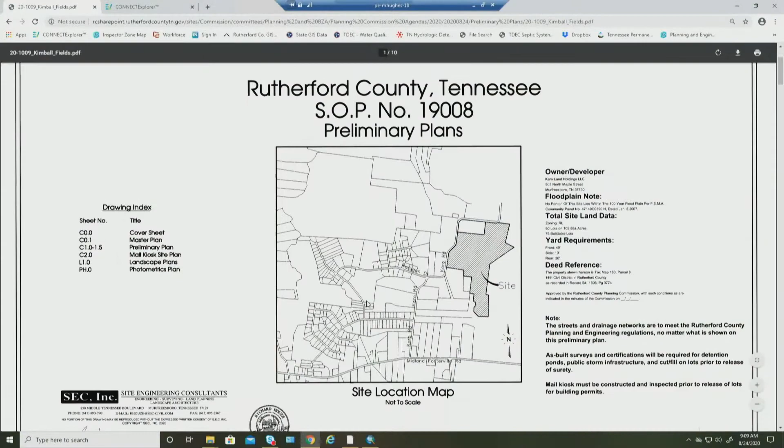A preliminary plan for this development was approved by the Planning Commission back in April of 2019. The original design has been reworked to reduce the amount of paved area and cost of infrastructure. The changes they wanted to make were going to be more than we could approve administratively, so we recommended that the applicant resubmit their preliminary plan and bring it back through the process to the Planning Commission. We did have, as staff, several comments on the plan. Most of what I would call the housekeeping ones have been addressed. There are a couple of outstanding items, though, that we wanted to have some more discussion about here at the Planning Commission.

One of them has to do with the entrance along Carroll Road, the northernmost entrance. There are 2 separate entrance points that Mike's pointing out there. The one we're concerned with is the one on the north side that Mike's highlighting right in that area. You can see it's very close to the 90-degree bend in Carroll Road. We had some discussions amongst ourselves, as staff, and also with the applicant's design engineer, so we'll talk a little bit more about that. Also, the intersection within the subdivision, Mike will highlight that, the one down at the middle about the lots.

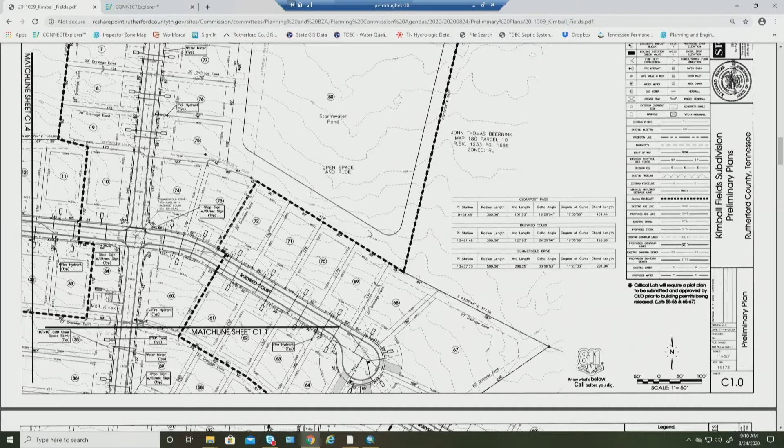That particular intersection, I like the fact that there's multiple ways in and out of this development, but it looks like there's several lots that might be cut off should something happen at that intersection. Mike and I talked about this a little bit on Friday, about the fact that in any subdivision you're going to have some amount of that, where a number of lots might be cut off from the rest of the development depending on what would happen at an intersection. So I don't think we feel as strongly about that one anymore, but we do still have concerns about the one on the northern side, that access to Carroll Road. With that, I'll turn it over to Mike to discuss in more detail. Thank you, Doug.

90-degree road bends were established back in the day to go around farms. They do slow the traffic down a lot. So I'm having a little heartburn about this road connection in close proximity to this almost 90-degree bend right here. There is a fence row that has heavy vegetation along this field. I worry that somebody comes around this corner wide as somebody's pulling out here, and that could be a bad situation.

What we recommended, and we're still open for discussion on this, but I was thinking maybe if we had the proposed road come in and line up and make this a three-way T intersection, with stop conditions all three ways.

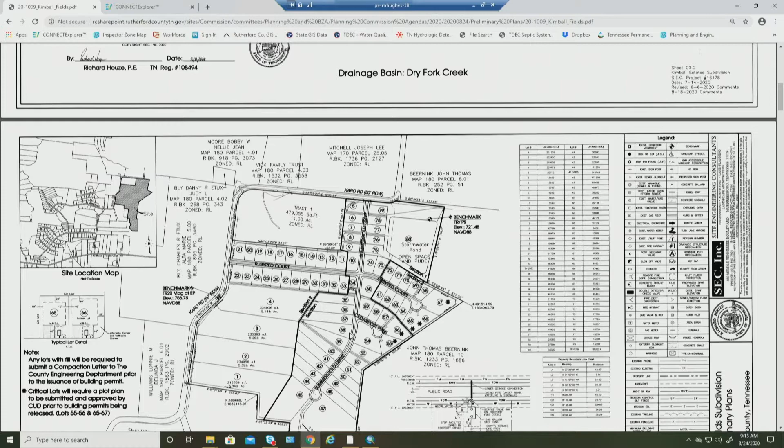Good morning, everybody. I'm Jamie Reed with SEC. Like Mike said, the two major issues, and the reason why we didn't stub it straight into that, was because we didn't want a thoroughfare coming through that little small subdivision. Before we had it approved with one entrance over to this other side. Now we're teeing it up. We ran two entrances into, and it's just 80 lots. We didn't feel that coming straight into the subdivision for a handful of lots for a small residential subdivision was a good design. We like the traffic calming device of them still turning. And on top of that, there's hydric soils right where that road's teeing into, right where we got the pond. Our guys are out there currently doing an HD report right now, but it definitely shows it right there with that tee of that road. So that's the other reason we didn't go out there, because it's not good to have a road on that type of soils or lots. So that's the other reason we pushed that road over. But like Mike said, if it's something the commission feels necessary that we need to move it back over, those are the issues we're faced with. Our thoughts: we're trying to calm the traffic, still make them keep doing like they're doing now, and the soils.

Right. Yeah, what we might look at is lowering the speed limit through here. We've done that in other places. I need to reach out, and maybe Doug can help you get it, if there are any accidents in that corner, maybe we could look at that. But these 90-degree curves in the county give me heartburn everywhere. I understand, like I said, they were developed around farm fields. We've got one, I know, south of Buchanan Estates, just a straight 90-degree turn. Got two past that, another right, 90 and another 90 right there. Yes, you got three 90s within 2,000 feet. If I had my druthers, I'd eliminate them all and slow traffic down the best way I could before I got there. But like I said, there's a fence on this inside track that's a lot of vegetation, so it limits your view around the corner here.

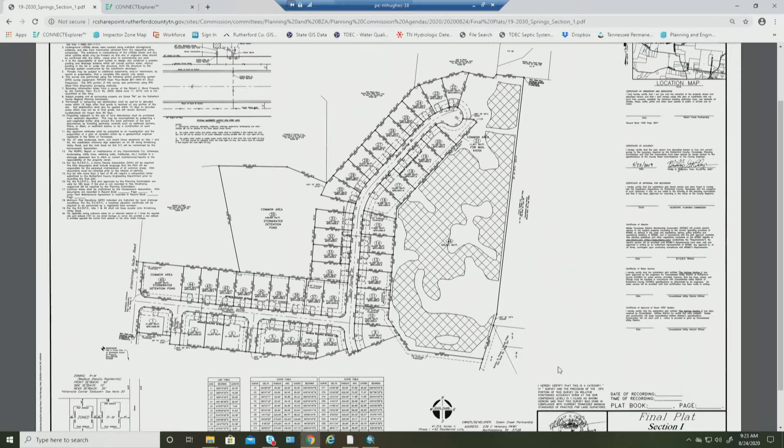Still recommended approval? Yes, sir. Make a motion to approve. And a second. We have a motion and a second to approve item number 19-2030, The Springs, Section 1.

This is a reapproval. Call the roll, please, Gail. Charlotte P., Chip Pinion: Yes. Craig Lynch, David Jones: Yes. Jim Averwater, Lee Bogle, Marvin Whitworth, Mike Cush: Yes. Pettis Reed: Yes. Rhonda Allen: Yes. Jeff Phillips: Yes. Motion carries. Thank you.

Item number 19-2031, The Springs, Section 2, reapproval, 28 lots on 11.98 acres zoned RM, located along Armstrong Valley Road. Salem Creek Partnership is the applicant.

Yes, sir, same thing? Yes, sir. Same bat time, same bat channel. Motion to approve. Second. A motion and a second to approve 19-2031, The Springs, Section 2.

Call the roll. Charlotte P., Chip Pinion: Yes. Craig Lynch, David Jones: Yes. Jim Averwater, Lee Bogle, Marvin Whitworth, Mike Cush: Yes. Pettis Reed: Yes. Rhonda Allen: Yes. Jeff Phillips: Yes. Motion carries.

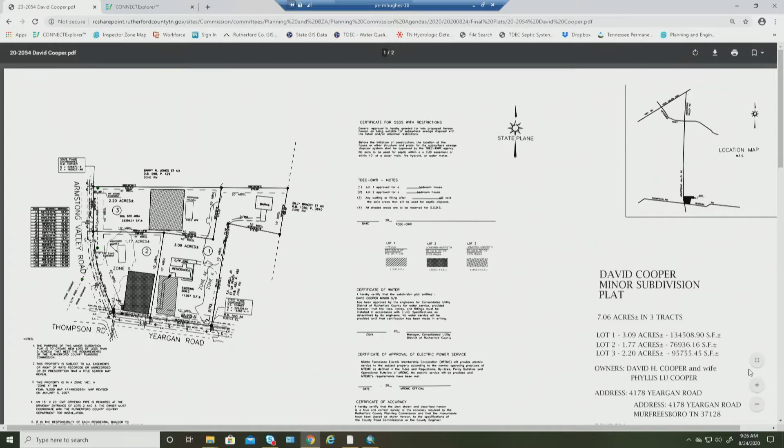Other questions? Call the roll. Charlotte P.: Yes. Chip Pinion: Yes. Craig Lynch, David Jones: Yes. Jim Averwater, Lee Bogle, Marvin Whitworth, Mike Cush: Yes. Pettis Reed: Yes. Rhonda Allen: Yes. Jeff Phillips: Yes. Motion carries.

Item 6C4 has been removed. Item 6C5, the item number is 20-2063, Rooker Landing, Section 2, 29 lots on 6.78 acres, zoned PUD, located off Rucker Road. Landquester LLC is the applicant.

Doug? Yes, sir, thank you. The revised preliminary plan for this property was approved by the Planning Commission back in February of this year. This final plat does appear to be consistent with that preliminary approval. All of our comments have been addressed on this, and the final plat itself is in very good order. So with that, we'll be happy to answer any questions.

Questions? Motion to approve. We have a motion and a second to approve item 20-2063, Rooker Landing, Section 2.

Call the roll, please, Gail. Charlotte P., Yes. Chip Pinion, Yes. Craig Lynch, David Jones, Yes. Jim Averwater, Lee Bogle, Marvin Whitworth, Mike Cush, Yes. Pettis Reed, Yes. Rhonda Allen, Yes. Jeff Phillips, Yes. Motion carries. Thank you.

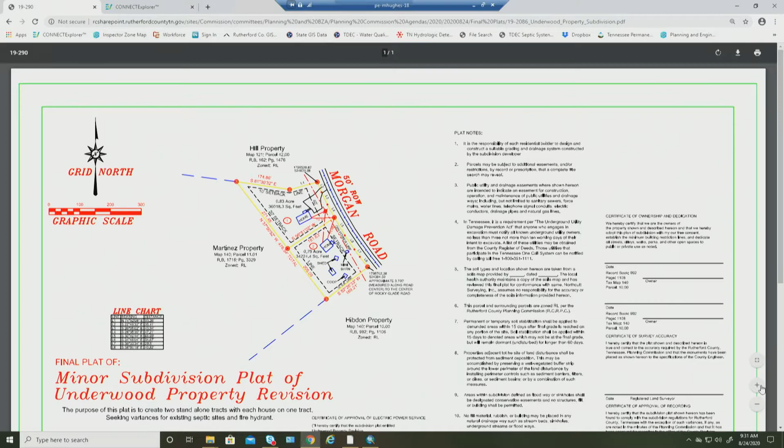I have a motion and a second to approve. I don't know what the item number is, but it is 19-2086, final plat.

Call the roll, please, Gail. Charlotte P., Chip Pinion, Yes. Craig Lynch, David Jones, Yes. Jim Averwater, Lee Bogle, Marvin Whitworth, Mike Cush, Yes. Pettis Reed, Yes. Rhonda Allen, Yes. Jeff Phillips, Yes. Motion carries. Thank you.

Item 6D, these are items submitted for site plan approval. Item number 1, as you can see, is the Burnt Knob self-storage request that has come before this commission several times, and I believe it'll probably create a number of questions. So without objection, I'm going to move this item to the last on our agenda so we can get the other items out of the way first.

Item 6D2, the item number is 203026, Watson Barn Rental, construction of approximately 200 square foot office space and display area. These are for outdoor barns on approximately 8 acres, zoned CS, located along Shelbyville Pike. Watson Barn Rentals is the applicant. Doug? Yes, sir. Thank you.

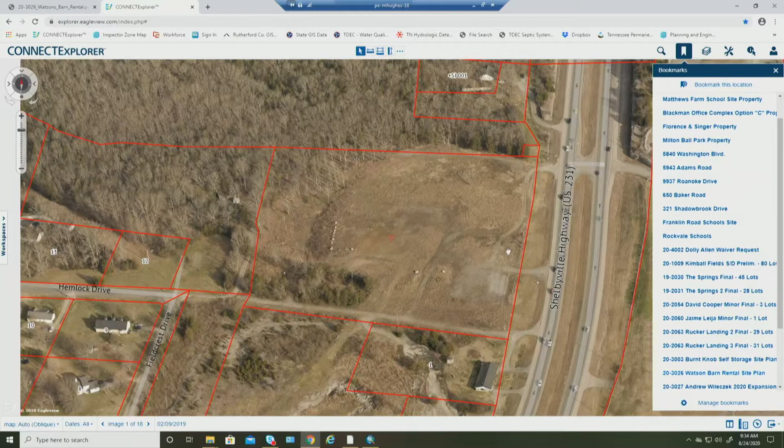But it looks like the gravel area needs to be expanded to position the barns on, and potentially this area here. They're going to lease half of this to, I think, Watson's Barns Rental, the lower half, and there is a little bit of an existing area here that they're going to take advantage of.

If I can get back to the plan, it looks like in other areas they don't really show the gravel area. I'm just worried if a fire truck has to come in there to put out a fire, they'll sink in areas that don't have the gravel support.

And if they could consolidate them on that existing gravel area or expand the gravel area, I would be okay with that. But other than that, like Doug mentioned, the entrances are - right now this is just a gravel drive out to Shelbyville Highway, and this one is substandard. It is paved, but it's cracked, and it was just an access for a field.

One thing I do want to mention about the location of the barns - I agree with what Mike is saying. The one thing I would say is I don't expect there to be barns in that exact location. That whole area is going to be a display area, which we're okay with, we don't have a problem with that. I think that was more for display, just to show this is where some of these barns could be stored. So just be aware it might not look exactly like that as far as barn storage goes. But I agree with Mike that if they could augment some of that, then I think we'd be fine with that.

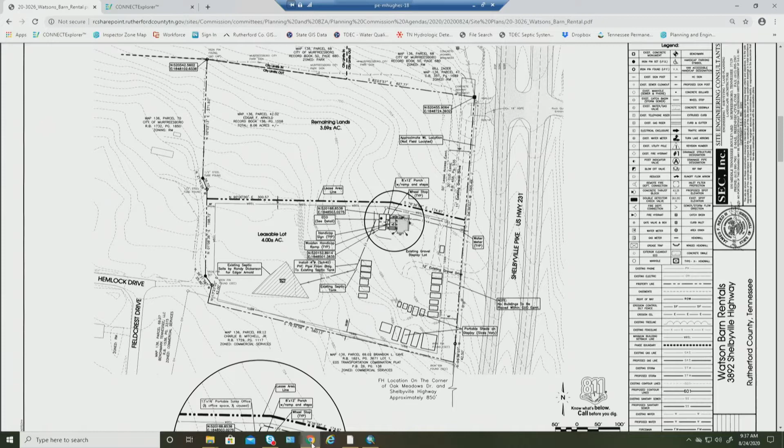But I did look at those entranceways, and I think they were originally built by TDOT standards to go to where they had to go. But I think it's important that we give these property owners time now to get this going, because they have been put off on this situation right there. So I think we move on with working on this. Y'all work together getting this done. We move this on so that we can get that happening out there.

I think this will be an addition to the county that the county needs out there. Both entrances right there will be important to going there, and I think it'll be important to that area out there. So I'll make that motion with staff statements.

Thank you. We have a motion and a second. I'll second it. Thank you. Motion and a second to approve item number 20-3026, Watson Barn Rental.

Other questions? Call the roll please. Charlotte P. Yes. Chip Pinion. Yes. Craig Lynch. David Jones. Yes. Jim Averwater. Lee Bogle. Marvin Whitworth. Mike Cush. Yes. Pettis Reed. Yes. Rhonda Allen. Yes. Jeff Phillips. Yes. Motion carries.

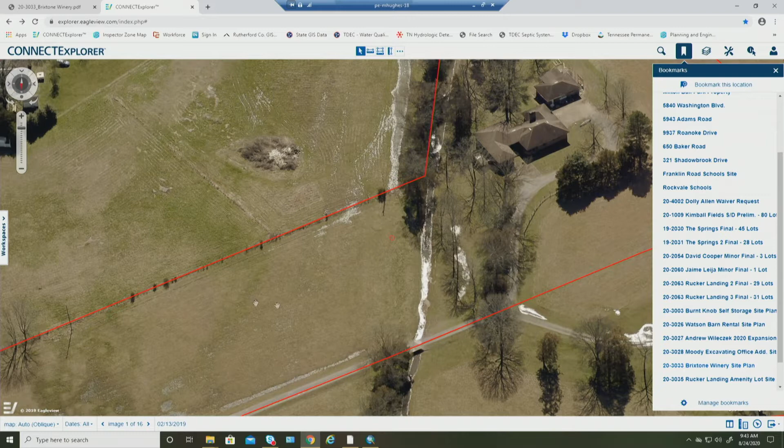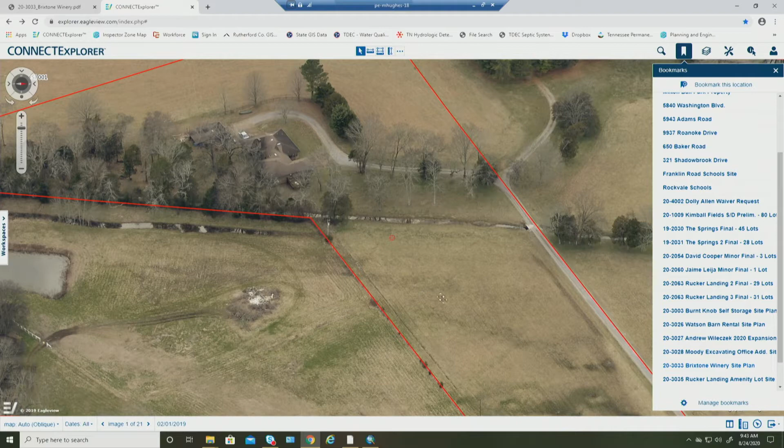Some of the bigger issues had to do with a one-lane bridge over the existing ditch, waterway, conveyance area on the property, which they've expanded to 2-lane for two-way traffic. There were also concerns discussed at the Board of Commissioners and Planning Commission meeting regarding screening to the property to the west. They're showing an overflow parking area there, but this phase of the project is not going to really utilize that. This is for smaller events, tasting room and things like that.

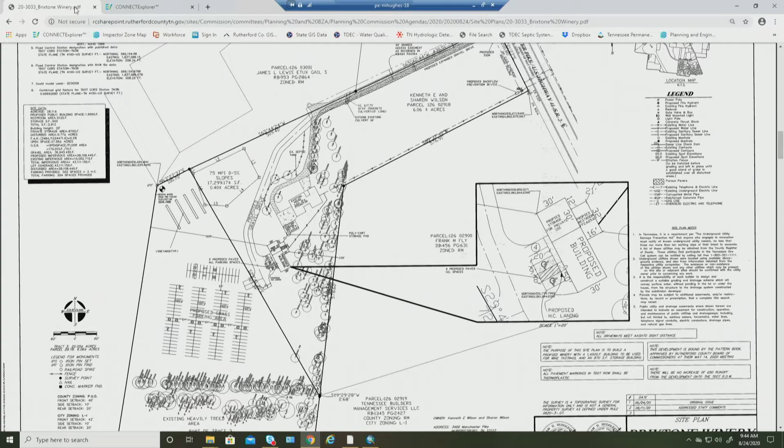It's just an open field for now. It's actually one they're thinking about purchasing from the neighbor anyway, so we'll work with them on that western property line. Beyond that, most of our comments have been addressed, and the site plan does appear to be in good order. We'll be happy to answer any questions.

Very good, questions? Mr. Chairman, I would make a motion to approve with staff comments. Second. We have a motion and a second to approve 20-3033 Brixtone Winery. Call the roll, please, Gail.

Chip, yes. Craig Lynch, yes. David Jones, yes. Jim Averwater, yes. Lee Bogle, yes. Marvin Whitworth, yes. Mike Cush, yes. Motion carries. Thank you.

6D6, 20-3035, Rucker Landing Amenity lot, an amenity lot it looks like. Construction of a mail kiosk on .72 acres. This is on Lot 57, zoned PUD, located off Rucker Road. Landquester is the applicant.

This site will be used as the amenity area for the Rucker Landing subdivision, as well as the location of the development's mail kiosk. Our comments have been addressed, so it's in good order. We'll be happy to answer any questions about the plan. Doug? Questions, comments?

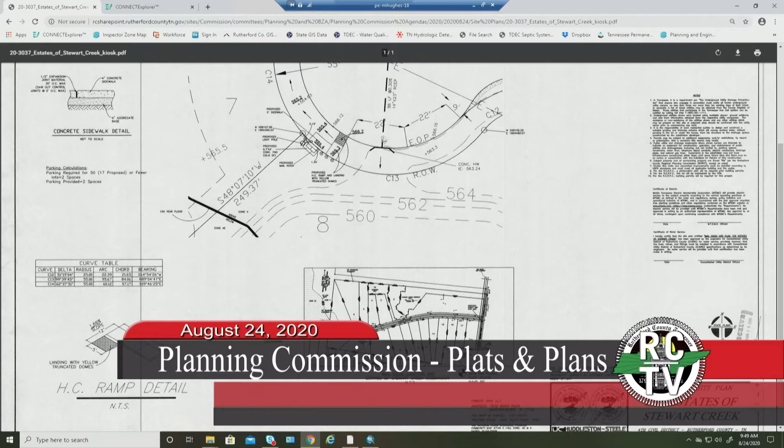Thank you, Doug. Now, I'm not an engineer, but where's the parking spaces? They're actually, yeah, go ahead, Mike. They're just going to utilize the turnaround. Just get your mail and then leave. So there are none, no striped parking spots. They're just going to park. For 17 lots, we didn't feel that a dedicated parking lot for these few lots would be worthwhile. So we've done this in other places, just have them park and get their mail and leave. It's not going to be long-term parking, just long enough to get their mail.

Subject to staff comments, I move to approve. Thank you, Marvin. I have a motion and a second to approve 20-3037, the Estates of Stewart Creek for a mail kiosk. Other questions? All those in favor?

Oops, can't hardly break that habit. Call the roll, please, Gail. Charlotte P. Chip Pinion. Yes. Craig Lynch. David Jones. Yes. Jim Averwater. Lee Bogle. Marvin Whitworth. Mike Cush. Yes. Pettis Reed. Yes. Rhonda Allen. Yes. Jeff Phillips. Yes. Motion carries. Thank you.

Item 6D1, 20-3003, Burnt Knob Self-Storage, construction of 5,400 square feet of mini storage facility space on 10.9 acres zoned LI located along Burnt Knob Road. Stuart Conway is the applicant. Doug? Yes, sir. Thank you.

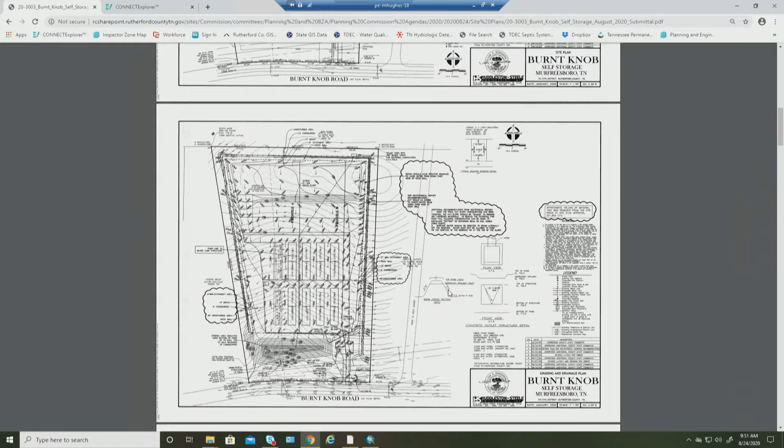This is compared to the April 27th plan that was a shade over 244,100, and then 286,200 and a few cubic yards for the February 24th, 2020 version. So the deepest cuts appear to be about the same, around 50 feet, for all the plans that we've looked at today.

When this was last brought before the Planning Commission, it was denied, and then we had a Zoom virtual meeting with the applicant and design engineer, both of whom are here today, regarding some possible design changes that might accommodate the use he wants. Keep in mind, back in 2016, this same site plan was approved, not in the shape it's in right now, but for the use, it was just the one property, and it was approved for about a 20-foot cut.

But for whatever reasons, the applicant didn't move forward with that, so then brought this back before us today. We were, and still believe, that there are ways to design this site so it can accommodate the applicant's use, but not have all of the cut coming off the property as shown on the plans they've presented this year. I know Mike probably has some additional comments. I'll let him chime in on that.

I will say that on your iPads, I included some documentation from the applicant, a letter addressed to the commission regarding his plans for the property, as well as a slideshow of different sites he's photographed regarding deep cuts and developments along those deep cuts. They're on your iPads. I'm not sure if the applicant wanted to go through those or not. I'll let the chair dictate how that's going to work, but we have them available on screen if needed. With that, I'll let Mike chime in on any other comments, and at this point I'll be happy to answer any questions.

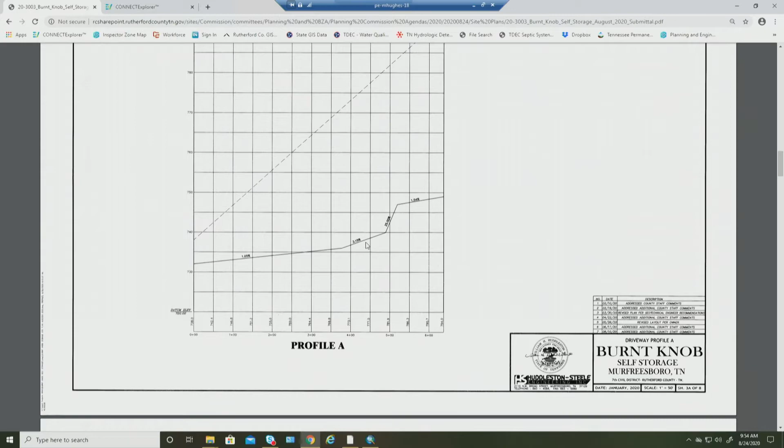Not really, no. They did make some tweaks to it, and Mike's showing one of the profiles there where they made some changes to the amount of cut being proposed and how they were doing it. The total amount of cut was reduced slightly, but as far as the actual design of the site, it's pretty similar to what we've looked at this year.

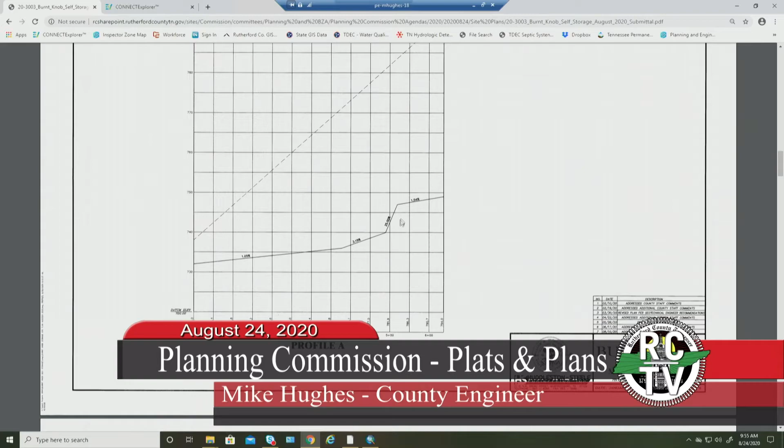As Doug stated, this profile shows they changed the back quarter of the property. The profile used to come essentially straight back, and they've ramped up the back a little bit here. But if you look at the grading plan, it's essentially the same for two-thirds to three-quarters of the way back.

As Doug mentioned, after the second denial, we had a Zoom meeting and discussed ways to make this a safer site without these deep cuts. One of my suggestions: there's a small power line that runs through the front of the property. It's not a three-phase power line, so it could easily be relocated to the frontage of Burnt Knob Road. That would open up all of this space to allow the detention pond to move forward.

That's the way it's draining anyway, and there's an existing culvert under Burnt Knob Road. My thought was, if you bring that forward, you can bring a ramp up and have a road go in behind this. As you're climbing up the road, not a steep climb, just a gentle climb, you come to a landing with a relatively flat spot for the first group of buildings. Then you could also have a little turnaround right here, ramp up again, turn and go back behind them.

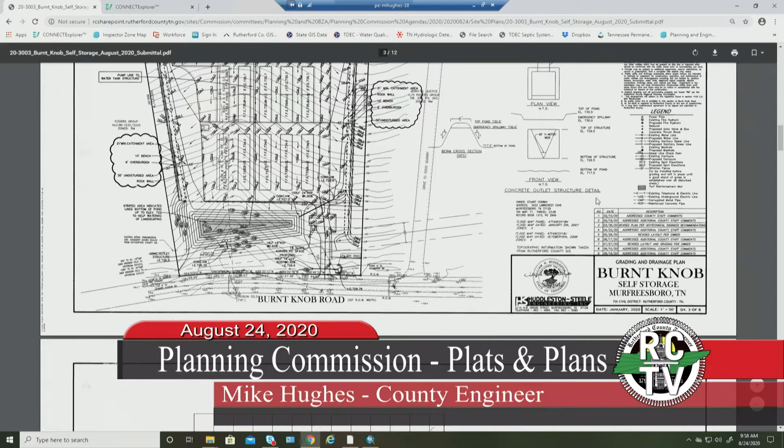Nothing from our last meeting with our recommended changes, to make these wide, long, sweeping turns to get up the hill and still have flat spots to do the development, was incorporated. So that's our hang up. Safety is paramount to us, just a long-term safety aspect of these deep cut walls.

Mike, you mentioned having several meetings, mostly Zoom meetings, with the applicant and the applicant's representatives, and made some suggested changes. Are any of those suggested changes incorporated in the site plan that's presented here today?

Like I said earlier, they just modified the back quarter of the property here, as you can see in this profile, but the front two-thirds, three-quarters of it is essentially the same. We could go back and look at the previous elevations. These are all the same.

There's ways to lessen the risk in this. He has hired geotechnical engineers to evaluate this. He's talked to other people. He's got a good civil engineer on board as well. But in my opinion, as a design engineer, there's ways to make this a safe site. The 2016 site plan that you approved did not have the deep cuts, so there's ways to make this work and still make it safer.

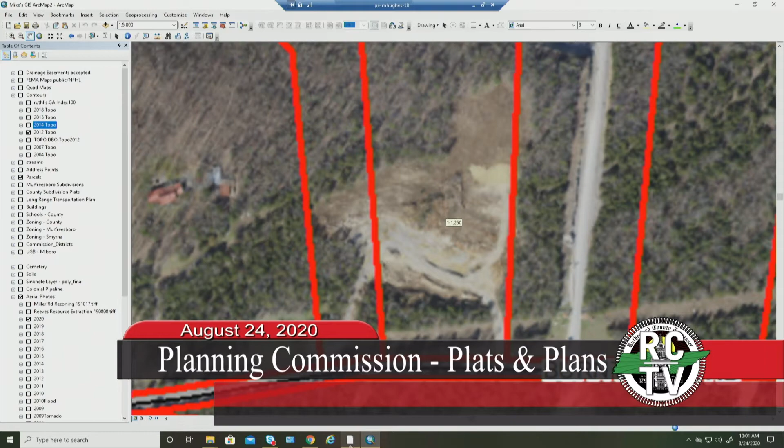We follow the Metro Nashville Stormwater Management Manual, and let me get to the grading sheet. You have to have pre-treatment for a detention pond. When you have water pouring into a site, you want to take that energy out and let it settle out so you don't stir up all the silt and sediment that has entered the pond from previous storm events. So we don't have a pre-treatment to the pond. I was hoping they would move it down here and redesign it, but I haven't seen that yet.

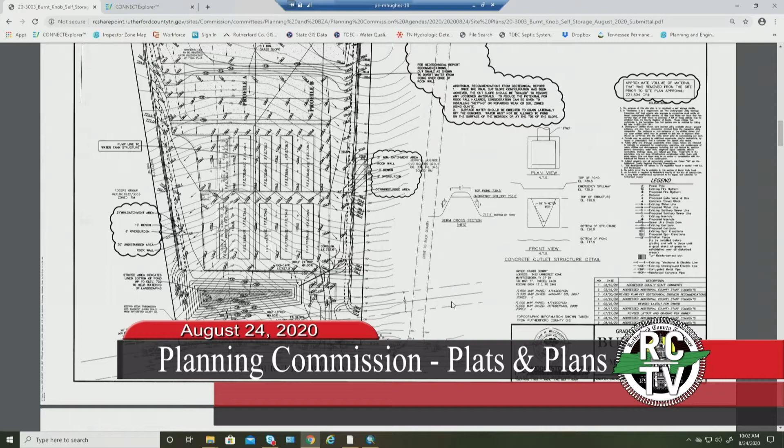That's where I'm standing. It's still pretty much a rehash of the previous design with a slight change in the back. And I want to stress, safety is my major key that I'm looking for.

Section 1106 of the zoning ordinance, I didn't mention this earlier. Item 1B is a prohibition of dangerous or objectionable elements. Even if we can get a great geotechnical on board, this has to be maintained forever. It's always a potential risk -- water intrusion, vegetation growing in the cracks of the rocks, loosening rocks. So there's ways to make this work and not have these deep cuts.

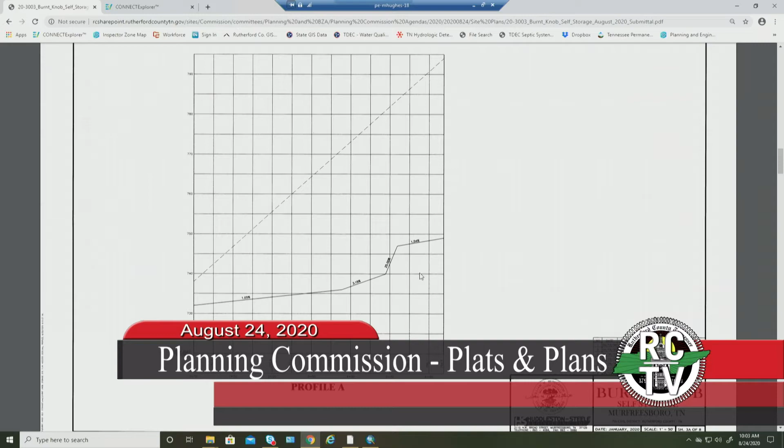I'm sorry if I'm rambling. Thank you, Mike.

Behind this property is the rock quarry. What effect does that have on this property?

Well, the blasting technology has improved dramatically in the past 20 to 25 years. They've limited the size of charges, they've increased the number of charges, so you've got smaller charges but more of them to essentially get the same rock blasts or split. So the geotechnical took that into question. He does not think it will impact this development if you approve it as is, but constant shaking, constant water intrusion, like I said earlier, and the potential for vegetation getting into the cracks, loosening the rocks, is always a concern.

But like I said, his geotechnical engineer did not state that it was an issue. Mike, on the quarry side, to the bottom, say the bottom of where we want to go with the storage buildings. Jump over in the quarry. Is water coming out at any of those levels on the backside, like it would on this side? Not that I believe.

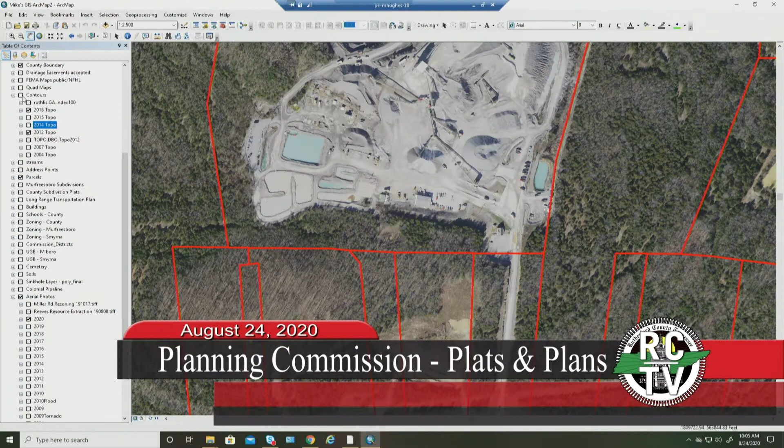Let me turn this on. There are some settling ponds. This pond, and forgive me if this takes a second, like I said, there's about a 10-second delay on this from what's up on the screen.

So the contours are already drawn here. They're not on my map, so I'm kind of looking back and forth. There's a little bit of a ridge here. Groundwater can move underneath hills, and they do that in several places, and I can show you a dye trace in other places. But surface water, they have a settling pond over here that drains off this way, and these other ponds drain off to the north. So I don't see their water impacting this site. Surface water, it could have, groundwater could be an issue, but I don't know that. That might be a question for the geotechnical engineer.

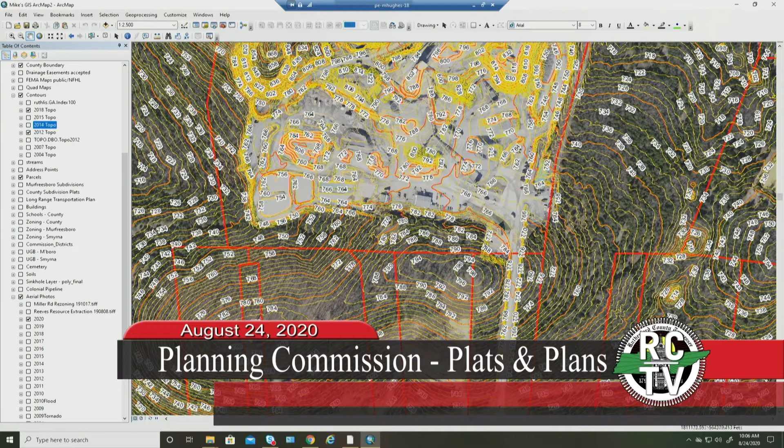Water in quarries, water comes out the walls. Right, that's what I was saying, if it's coming out. Oh yes, that's at an elevation comparable to the elevation on this side. Let's see, right now, say the middle of the site, you're looking at 770. There's a 770 here. As you go farther north, the deeper they are in their quarry. They're a lot deeper than the bottom of what we're talking about here.

So here's a big deep pit right here. It will take my computer probably several seconds to redraw. I apologize, we've had technical difficulties and it's painfully slow. But it's much deeper here, and even farther to the north is another deep cut.

This area is more of a processing rock storage area where they bust the rock up. They're mining it, I believe, farther north in this area here. They'll bring it up here, crush it to different sizes, process it, and then ship it out, store it and ship it out. But they are several feet lower on this end.

The quarry has to follow MSHA, Mine Safety and Health Administration. It's like OSHA, but for mines. It's their cousin. They have inspections people. That's all they do is drive around the mine and inspect it on a daily basis to look for potential hazards.

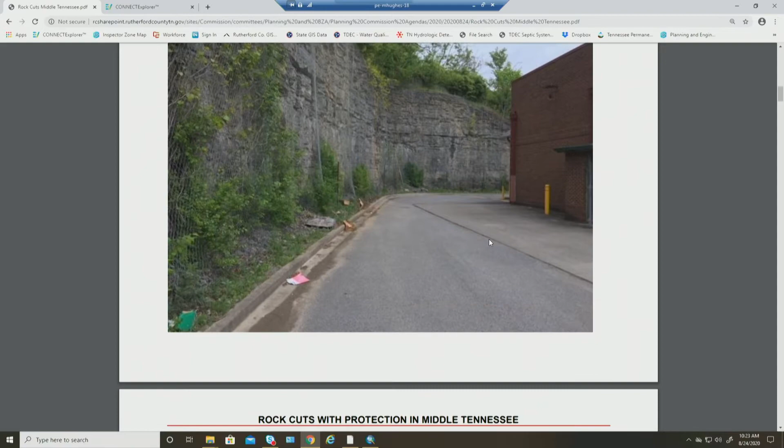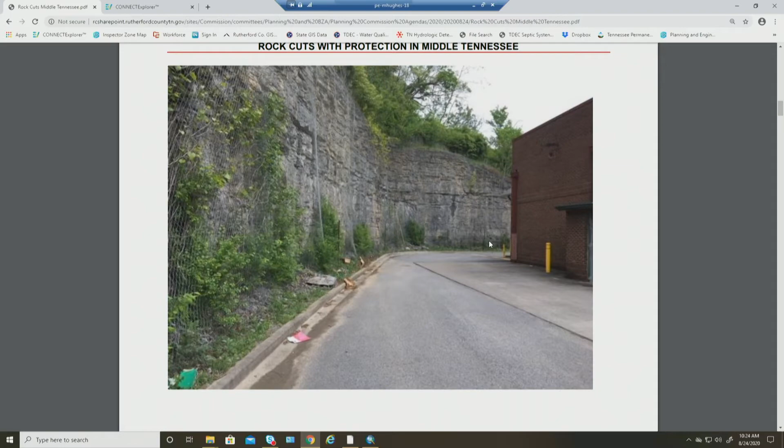They had about a 25 to 30-foot rock cut. How high was that, Mark? That's about 30 feet — there's one photo I have. I should have marked it that's approximately 30 feet high. You can see the building — it's taller than the building. It's a one-story building with a mezzanine, so that's probably 25 feet tall.

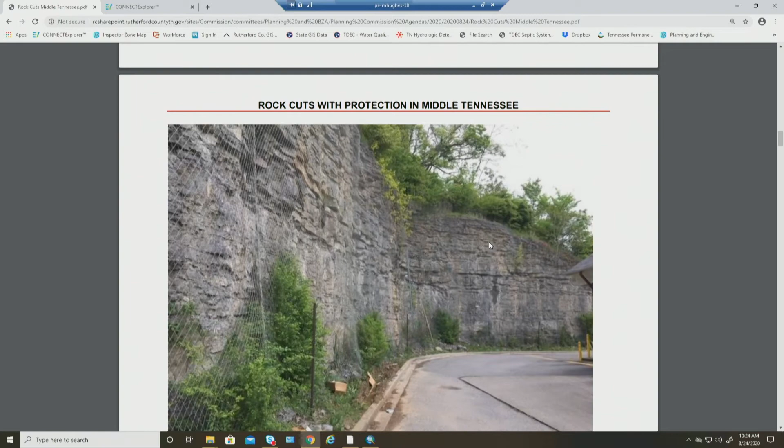At the same site. Okay. If you would, tell us who you are. Oh, I'm Mark Herman with TTL.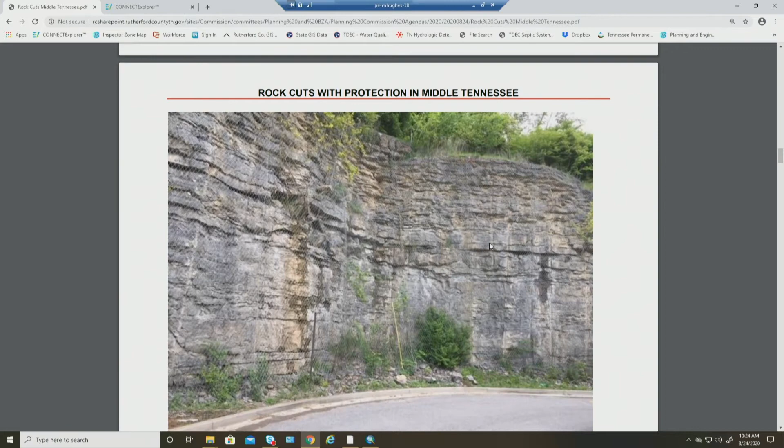While we're looking at those, let me ask a quick question. We had a site approval back in 2016, if I remember that date right. Have you compared that site plan to this site plan and given an opinion as to which might be the safer site? No, I have not compared the two.

Thank you. This is McKay's Bookstore, at Old Hickory Boulevard and I-40 in Nashville.

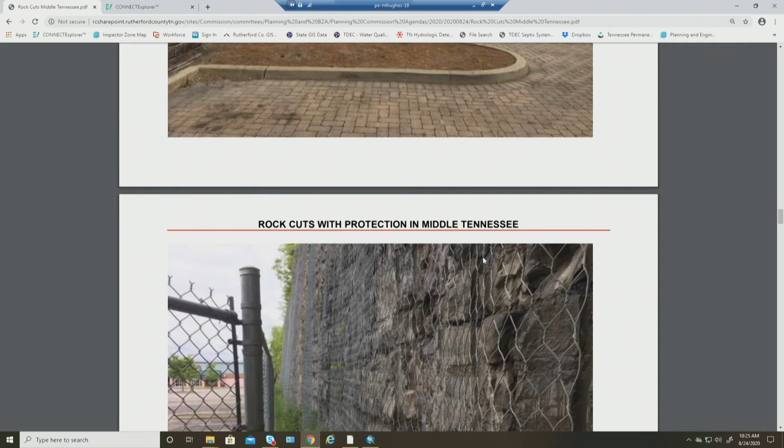This cut's not as high — it's probably about 20 feet. They put the fencing in, and at the bottom you can see a little bit of the talus buildup, but that was built, I believe, about 15 years ago, and you can see just a very limited amount of talus built up at the base of the slope.

Do you have extra? Do you have an extra?

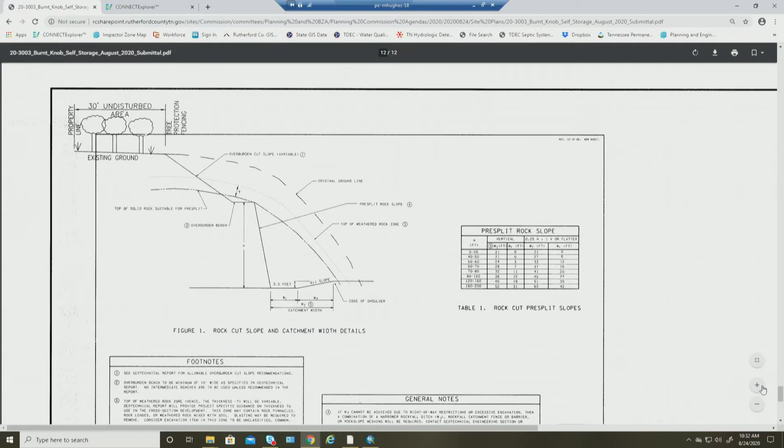But one thing, this is the TDOT detail. This is what we've designed by. You see how it shows in that catchment area, it actually slopes back towards the wall, so we've got that as a factor of safety. We've also increased our factor of safety on this new plan, which hasn't been brought up. We've scooted the asphalt in away from the catchment area. Now we're showing extra space from the edge of our asphalt to this catchment area, and that provides another factor of safety.

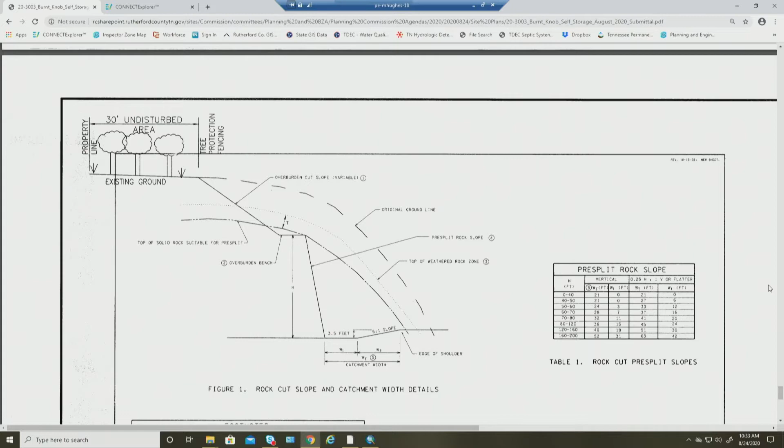And that's a key difference in this new plan as opposed to the old plan. I'll be happy to answer any questions you may have.

This is an expert. I work with him on many projects all the time. He knows what he's doing. I'll agree with that. Yep, he's a good one. He's a good one.

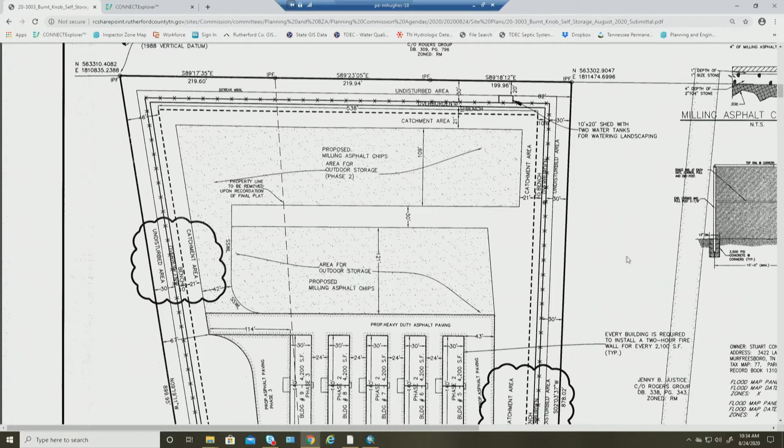Thank you. Bill, before you leave, Michael, would you scroll down to the plan view, the one that has dimensions on that backside? Site plan, yeah, right there. Go to the very back, or how about the one we have on our iPads that shows the 30-foot, 10-foot, 10-foot, 10-foot from the back of the property? I think it's one more up.

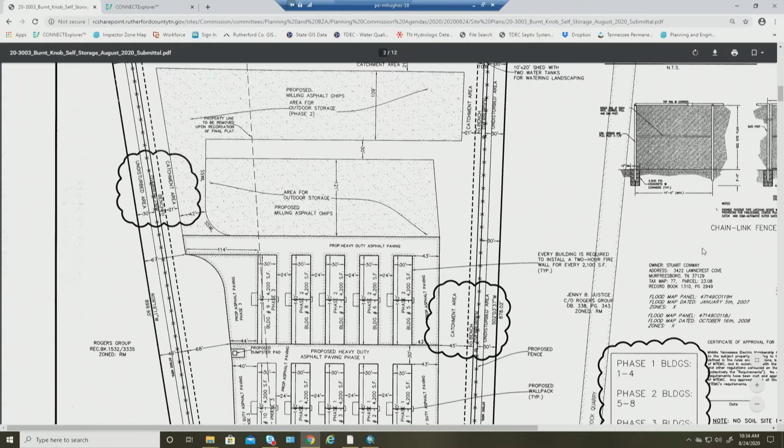Not sure, this is the existing condition one. How about what we have on our iPads right now? All right, I don't know. Yeah, what we're showing on the screen is the same thing you have on your iPad. C3, okay, grading sheet. Okay, let's see, right there. Can you scroll down a little bit? I want to see the backside. Or scroll up, no, other way, I'm sorry. Now can you enlarge that view a little bit?

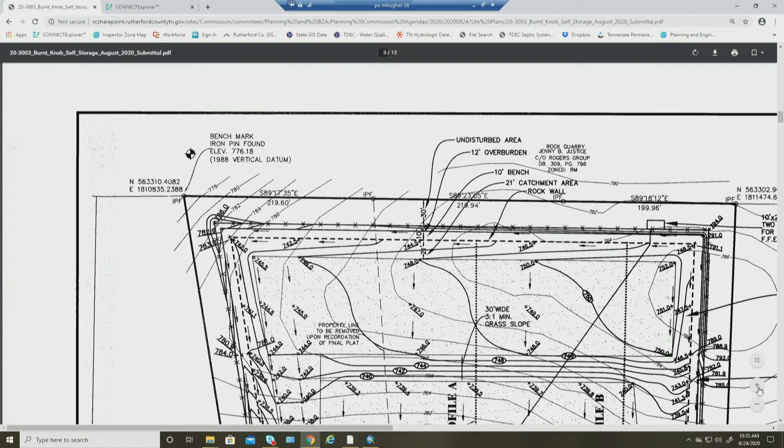I'm trying to get those dimensions clear. These are spot elevations. No, not elevations, I'm talking about distances. Bill, can you walk us through those distances back there? Yes, that 30-foot dimension is an undisturbed area. That's where our trees are and are going to continue to be. So that's the top of the hill? That's correct, that's the top.

Okay, then you've got a 10-foot bench, and then you've got the wall, and then you've got a 21-foot catchment area. So that dashed line, that horizontal dashed line represents the bench or the foot of the wall? It's the foot of the wall. Foot of the wall, okay.

All right, so then your 21-foot catchment area, and then from there you just have gravel parking lot where you're going to be parking RVs and boats and stuff. That's correct. And you see on the sides is what I was talking about, where you have the catchment area and the wall is dashed, but then you see I don't start my paving till 30 feet from there.

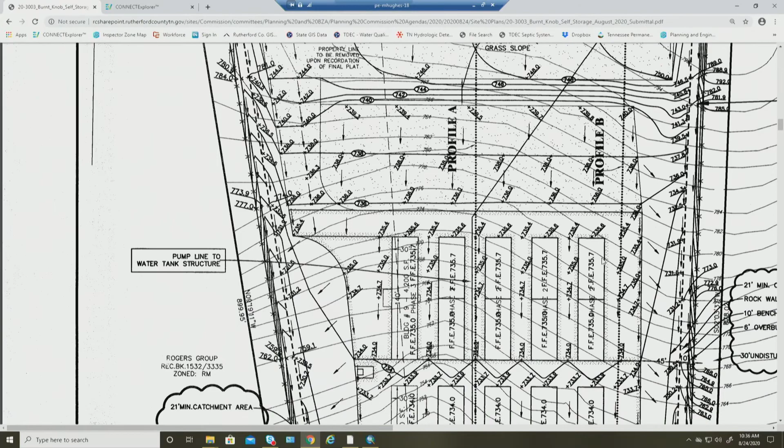Bill, let me ask you a question, similar to what I asked the gentleman a minute ago. You were involved in the 2016 site plan. You developed that plan, and it was approved. Why the changes? In your mind, why the changes?

I did, and now they're coming back with an entirely different plan. Here's the main reason: that last plan in 2016 had our site 20 to 24 feet above the road. The client wants to get this back down towards the road where it's visible. A comment was made about doing the buildings parallel instead of perpendicular. We prefer perpendicular because it provides better security, since you can see what somebody's doing back there. If you do them parallel to the roadway, somebody can get back in there and do whatever they want in further buildings. But the main reason this is different from that first plan is that the site started 20 to 24 feet higher than the road, and we don't want to do that.

Is that correct? I'm going to dig a little bit, forgive me if I'm out of line, but I don't think I am. Why wasn't that considered in 2016 versus right now? Why did you decide to make the change? I'm interested in knowing — the Planning Commission, the planning staff said it's a good plan, we approve it. And now the staff has concerns about the new plan. So why? What's at the bottom of it?

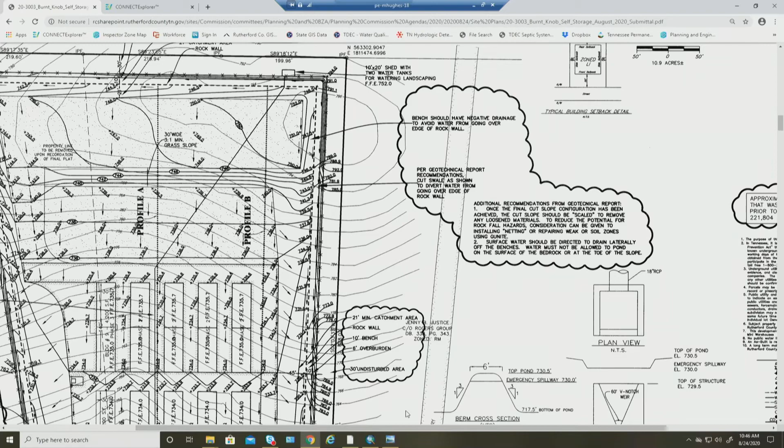On sheet 3, I don't know if you can pull that back up, there is a note addressing the netting, and I'll let Mark explain that. You see it's note number 1 there under additional recommendations from geotechnical report. Right, basically, it says that once they get the cut done, they're going to scale it, which is basically scratch it with a backhoe or track hoe bucket to release all the loosened items, and then make sure that surface water is draining away from the cut slope as much as possible to facilitate an atmosphere that won't accelerate weathering.

So tell me what that says, in layman's terms. What's that? What the engineer just said. Tell me what that says. I don't have anything in front of me, and I don't want to turn around and read it. Final cut slope configuration has been achieved. The cut slope should be scaled to remove any loosened materials to reduce the potential for rockfall hazards. Consideration can be given to installing netting or repairing weak or soil zones using gunite.

Okay, so that means the netting and the gunite are part of this site plan. Is that right, Doug? It could be. Could be. It could be, or it is? It depends on his recommendation at the time of construction.

Right, okay. Basically, you got to understand that what we did was we did three cores out there. They all showed very similar rock characteristics, but as we all know, the character of rock can change a little bit between locations. So even though what we saw in the core holes was very, very favorable, there might be a soil seam here or something of that sort that does need to be treated. And just like any other construction or grading site, you treat those at the time that the work is going on to produce a safe and stable slope. So there's a possibility you could determine that it's not needed?